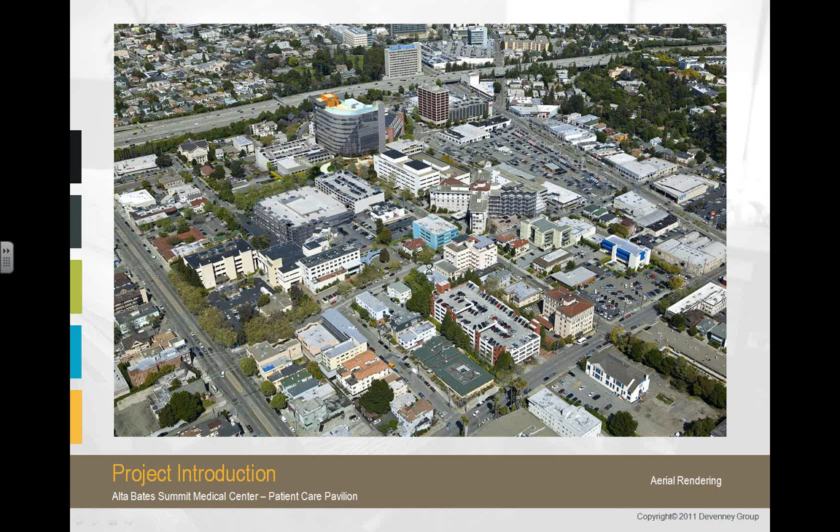It's approximately 13 stories, 11 above grade, 2 below grade. It was designed to be an icon, a new front door to the campus. It houses approximately 240 patient beds as well as several services. The existing operating rooms will remain in the seismically compliant section of the existing building. So it's really a bed tower.

You can see here in blue is the patient care pavilion and how it ties into the existing facility. There was a lot of attention that had to be paid to the proximity of our building to maintain operation of the current hospital while under construction. At points we're as close as 6 inches away from existing foundations of an operating acute care hospital. So there's obviously a lot of things that needed to be considered from a logistics standpoint for both construction and design. Since we are tying into an existing facility, we needed to make sure our floor-to-floor heights were matching up, which caused some complications throughout the process. We're approximately 12 feet 9 inches from floor to floor, with a lot of stories, which is really tight for an acute care hospital in getting all of the systems to work above ceiling and below structure. So that was one of the early challenges that we've been facing throughout the process.

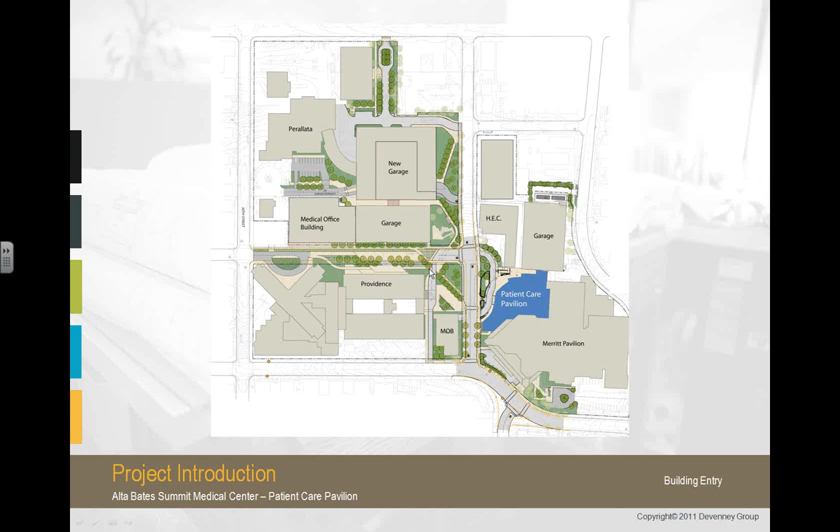This is just a concept rendering of the initial patient rooms. This is the actual view from the rooms out into the bay. Really sleek looking. This is one of the places I'd like to be sick at, obviously. Just a couple more views of what we were planning for the hospital itself.

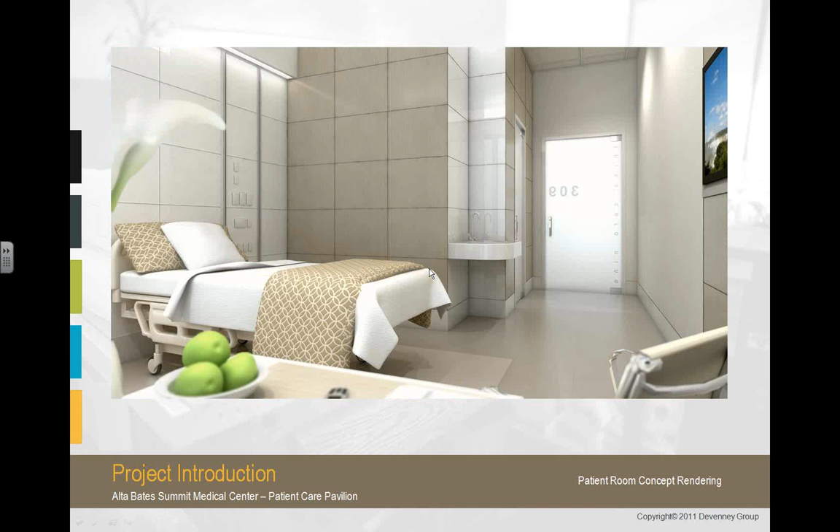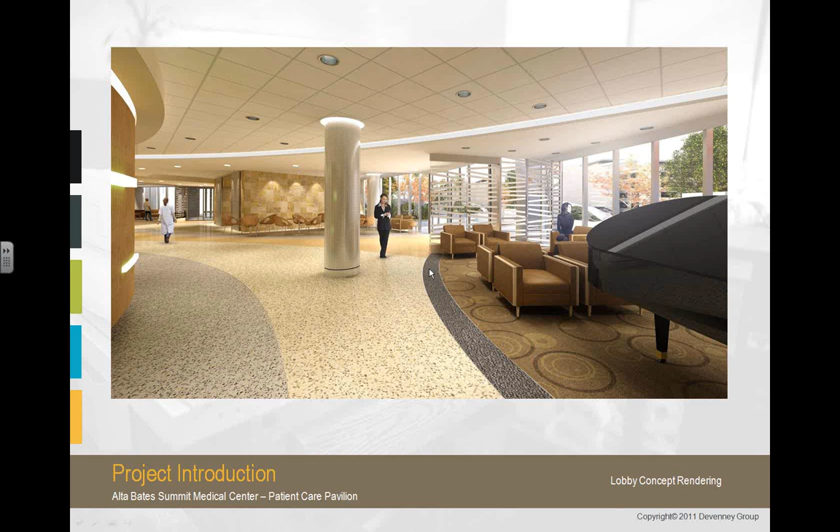This is a shot of the lobby, main entry into the hospital. Again, a lot of warm materials, inviting into the area. A typical nurse station—we have these on every floor, every patient unit has either 1 or 2, depending on the floor that you're on. Our elevator lobbies, and our family waiting rooms as well. Again, trying to utilize views of the bay as well as the Berkeley Hills. And this is just one last shot, taken directly from our model, incorporating some of the systems into the building at this point.

So we started design of the project back in December of 2007. We're real close to getting our last permit. Design is officially wrapped up, but there are a few loose ends that we're tying up right now, getting through the permit process. We had to demolish an existing 6-story dormitory building that was on site.

You can see in the lower left image here, we had to reroute the existing fresh air intake for the hospital so that it could be maintained during construction, so that all the operating rooms and other facilities within the existing building could be operational. There was some asbestos on site through demolition that was abated and removed.

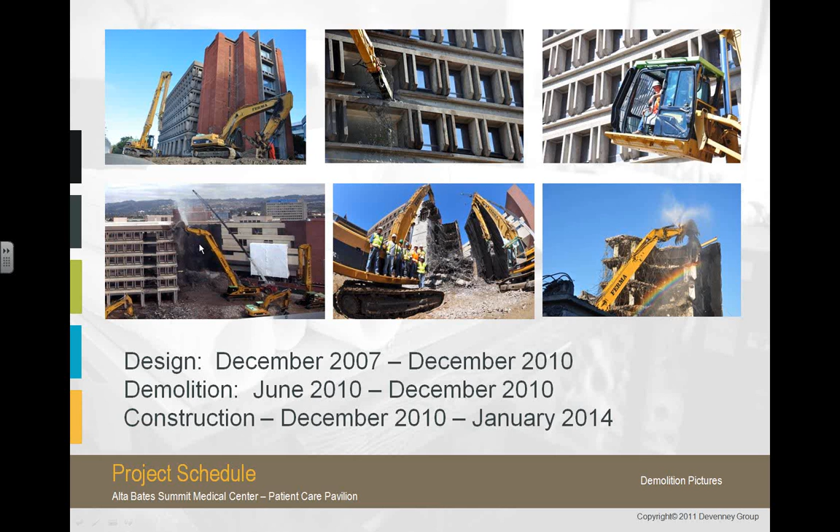This is just a list. This is an IPD, meaning Integrated Project Delivery Process. We have an integrated form of agreement, which is the IFOA team. This is a single contract between 12 different parties that are all equal partners within this process. We all have what I like to call skin in the game, meaning there's a shared profit pool where we have all put a certain percentage of our profit at risk for this project, meaning that we all have incentive to make this project come in on time and under budget, or else our profit could be at risk in this project.

The interesting thing here with who all is involved from an architectural standpoint is that we actually have more contractors than designers for part of this agreement, meaning that the people actually installing this work are involved in the design process and have a lot of say as well as input, giving us this unprecedented body of knowledge through the design process, which has been extremely helpful and added a lot of value to the project.

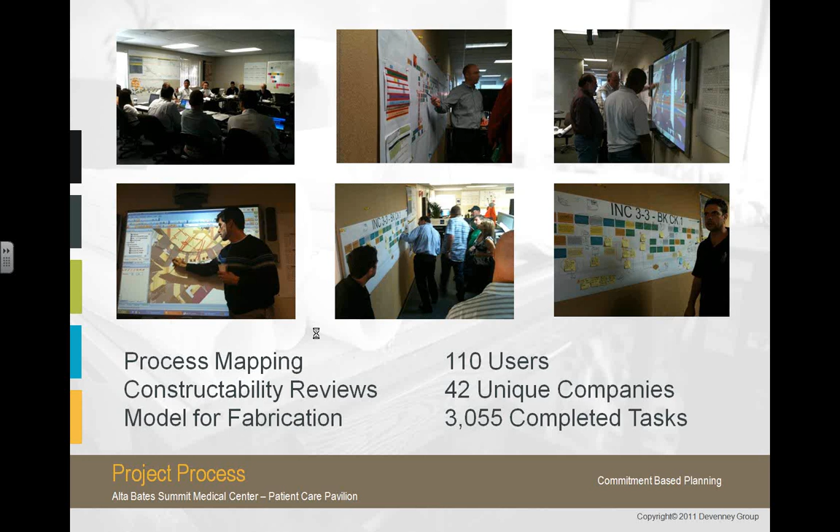Here are some images extracted from the model, showing some of the basic structures we encountered. At the top left, we're showing building steel with all the concrete decks and also deep foundations. The next image is of the dynamic systems within the building, all the MEP systems, and then looking at the building exterior and envelope.

These bottom images really show some of the complex level of coordination we went through, and the amount of information in this model, which has 97 million surfaces at the moment. Not only coordinating all the MEP systems, but what's not shown here is all the associated hanger location and seismic bracing location coordination, shown down to where the inserts would go for those hangers and areas of influence with halos, so we can lay out all of those deck inserts using a Trimble system to increase efficiency and accuracy of our installation.

It's really resulted not only in a more productive construction plan, but also a more productive model and building to construct, due to the amount of knowledge and constructability we've been able to insert within the design.

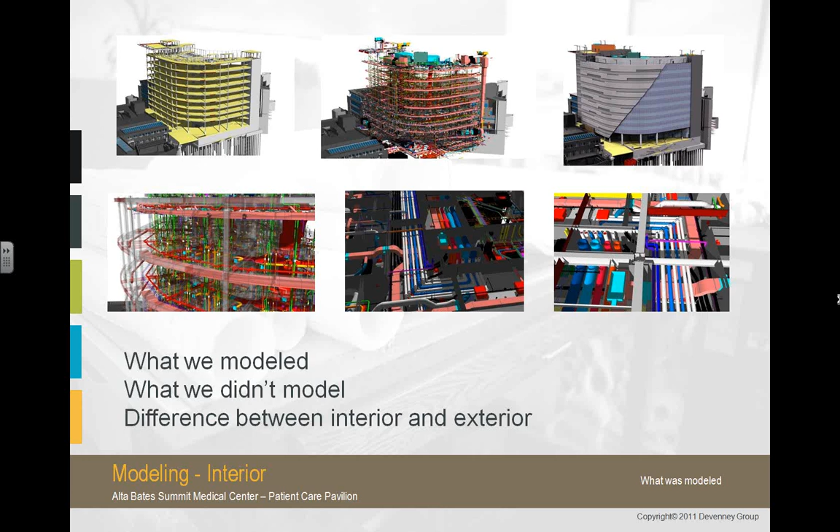There's a tremendous amount of square footage in this building, about 260,000 square feet, so a lot to coordinate. What we did is break it up into similar programs, meaning levels 5 through 10 are really just copies of each other as patient floors, and levels 3 and 4 are very similar. We broke it into much more manageable chunks to get toward the goal of a clash-free model.

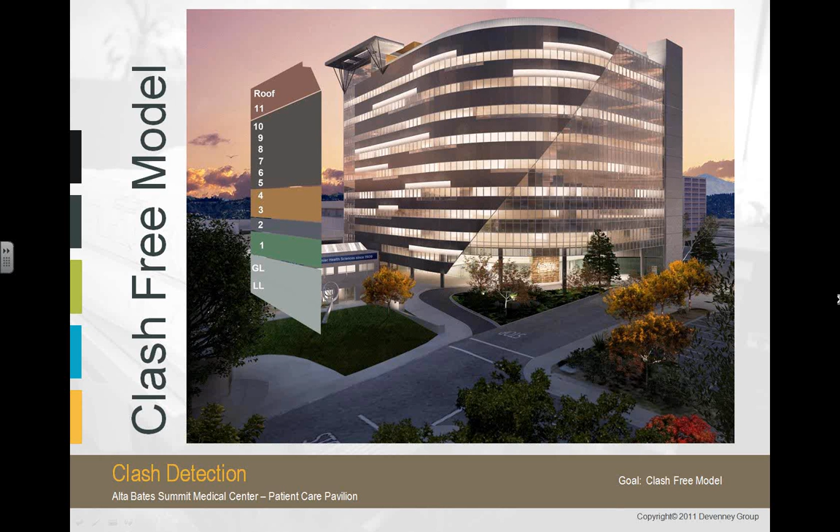At the beginning of this process we agreed to a trade clearance matrix for our MEP systems. There are really two key points: trades need room to install their work in the field, and the model is only as good as the accuracy of the installation. If we're not making realistic commitments about clearances, it's not going to work physically in the field.

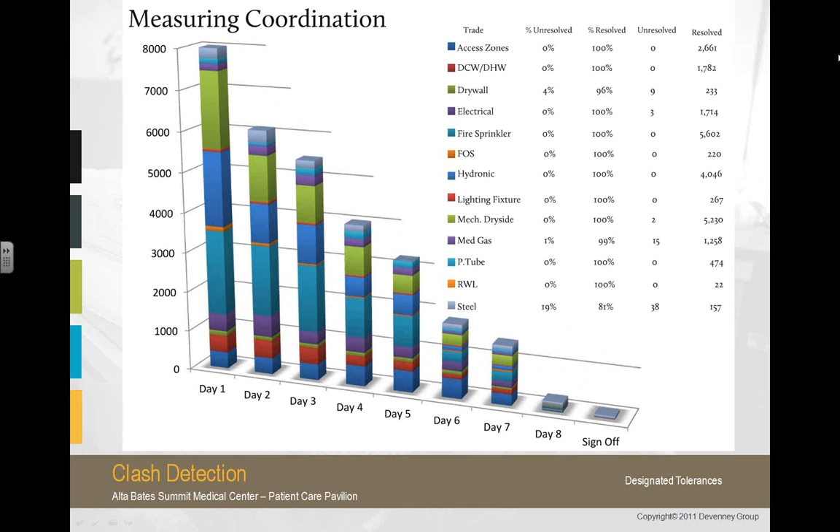The first time we did this we got down to approximately zero clashes, had sign-off, and were all feeling real good about ourselves. Then we took a step back and looked more closely, and found our model was reporting clash-free, but at specific locations — like a duct run with three offsets — we had to ask, is that really how we want to build it? We found we were too focused on individual clashes and missing the big picture.

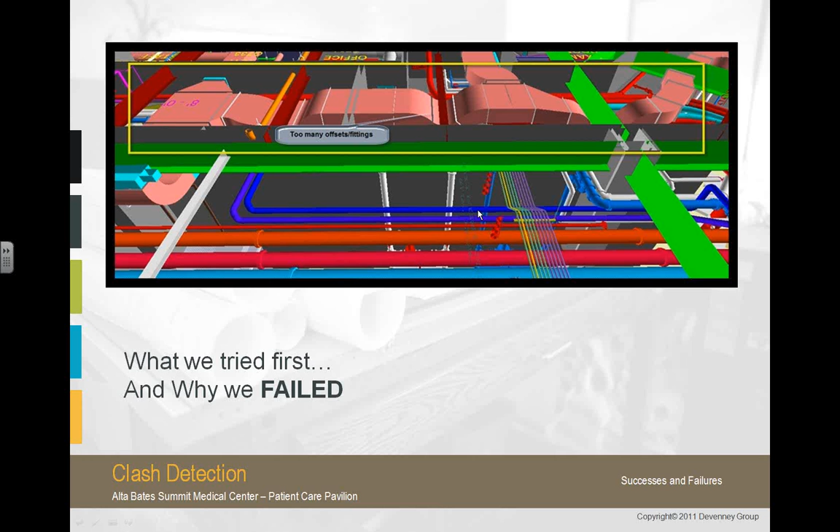So what we needed to do is take a step back and say, okay, we really need to have the individuals who are going to be installing in this conversation, in these clash weeks as well, going over and looking at the clashes and understanding why something's clashing and what may be a better solution. So this is the same area, same snapshot, and in this pinkish color is that same duct run with zero offsets now, provided with input from the trades as well. We found that we really needed everybody involved in order to make this a success.

Building in constructability is a priceless effort, and it's one of the most important things in the end game, to understand not just that it will be clash free, but that it's going in the way that we want it to, because these pieces of duct, for example, and most of our MEP systems, come straight from an automated fabrication system. These pieces of duct will come straight from Utah on a truck, right out of the plasma cutter, straight from the program in which they're coordinated. So we need to get them in the right shape so we can put them in productively.

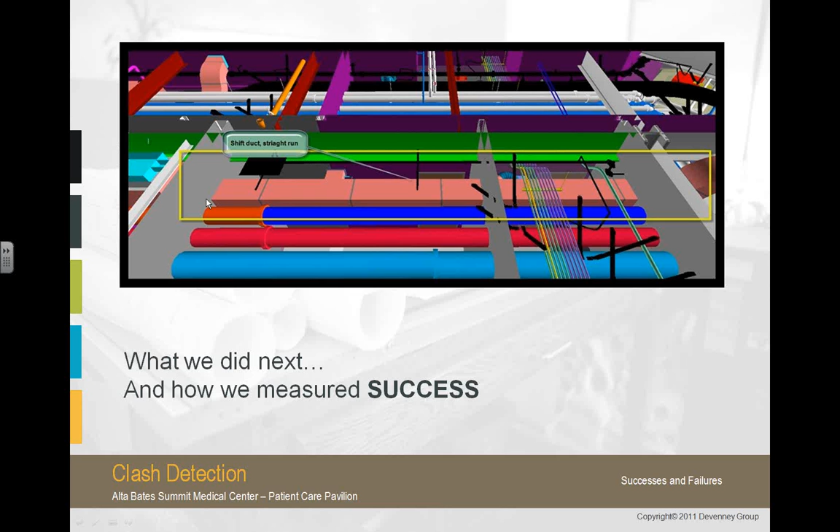So we did this for all 13 floors, obviously prior to submitting for our permit, so that we all had a high level of confidence that we weren't going to run into any major coordination items out in the field.

I want to touch on some of the exterior coordination that we went through too. We decided that there'd be some value, we didn't know how much, in modeling the exterior skin as well, and some of the components which tie into that. From an architectural standpoint, this isn't something we would typically do, but because our installer or fabricator for the curtain wall wasn't 3D capable at the time, we took on this effort.

For this example, we went about 100 hours above and beyond our typical modeling effort, which at a modeler's hourly rate of $100 came to about a $10,000 effort, to build this level of accuracy into the architectural design model. This is a $14 million exterior skin system.

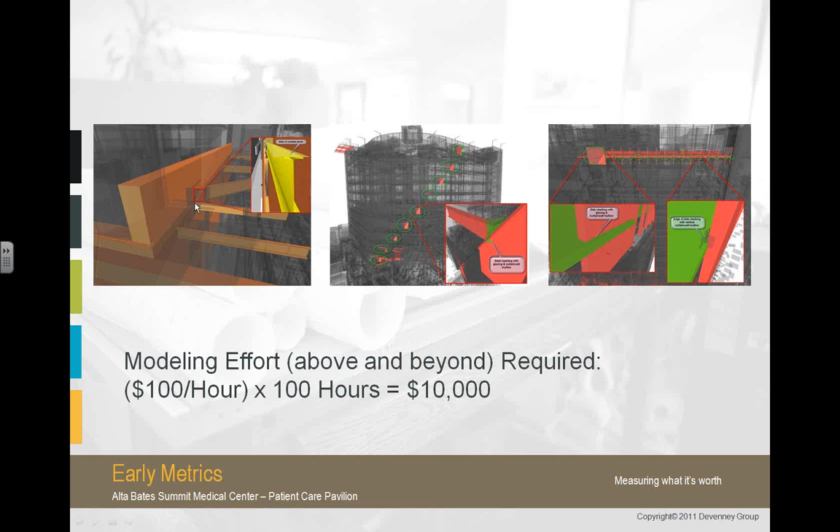Right, I just want to reiterate. These are things that we would have never found in a 2D world. We can cut as many sections as we want in a 2D world here, and these clashes just would not have been found.

So it's easy to really justify, on a $10,000 investment, we're close to $1.3 million on just 16 of these clashes. There's tremendous value in this effort. Although there's additional design time involved, the savings through construction are proving themselves now.

Just kind of summarizing some of the lessons that we've learned through here. I won't necessarily go through all of these. One thing that we found very important is that all partners need to be 3D capable. We talked about the extra modeling effort that we took on that typically an architect wouldn't do. If we can have the experts that are going to be installing this work, or experts in that field, modeling it, then there's just even more value to that.

Also understanding that even though we're doing such a high level of coordination within the industry, not just at this project, utilizing modeling capabilities, it's important to understand that we're permitted and built from 2D drawings. The inspectors with OSHPD will only look at the 2D permitted drawings, and it's important to understand that the information within the model gets into the drawing level, and making sure that cross-coordination is done, because we're only allowed to install what's on the 2D drawings.